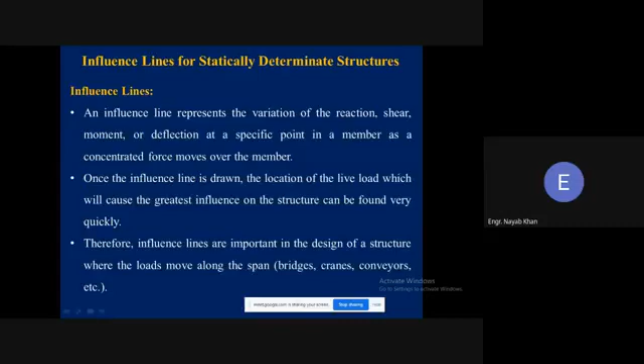But when the structure is subjected to live loads or moving loads, its variation cannot be shown using shear or moment diagrams, it will be shown using influence lines. So what is an influence line? It represents the variation of any reaction.

Let's suppose I'm having a continuous beam with support A, support B, and support C. Now if I subject the member to some moving load, the load will move along the member. If I want to draw the effect of these moving loads over this support reaction A, and I apply the load over here, what will be the condition of support A? If I apply it over here, how much force will be transferred to support A?

So it means I'm taking only one point. I move the loads over the member and determine the variation of the loads at this single point. So the influence line represents the variation of a reaction.

Now let's suppose I am taking a simply supported beam, and I say how much shear will be developed at the mid of the member because of the moving loads. So if I apply a moving load over here, how much shear will be developed at the midpoint? If I apply a moving load over here, how much shear force or moment will be developed at this point?

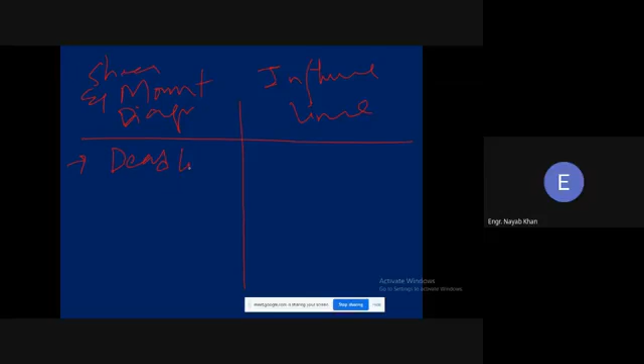Let me show another slide so we can easily write down the difference between the shear diagrams and the influence lines. Here we have a shear and moment diagram, and here we have the influence line. One difference between the influence line and the shear forces: here the loads are fixed dead loads, and here they are live loads or moving loads.

So, next difference. Anyone? Anyone else who can add something to this? Just think over it.

Let me tell you all the difference between the shear force and bending moment diagram and the influence lines. Here we consider the loads as fixed loads, and we calculate the reactions once, the support reactions and the moment, we calculate it once. But in influence lines we will be calculating all the reactions after each displacement of the load. As soon as we displace the load, we have to calculate the reactions again and again, so this is not a one-time case, we will be repeating the calculations.

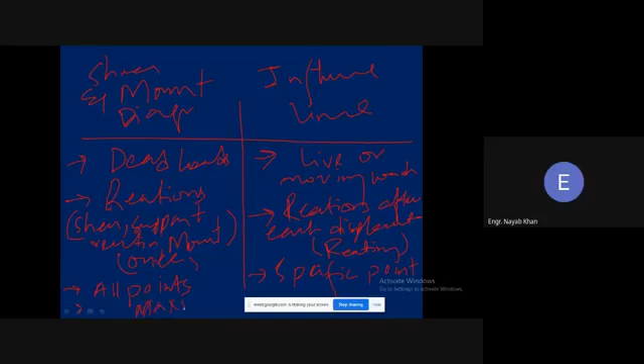Maximum internal forces, and here we get the maximum influence. That is not the internal force developed, that is just the influence when we apply the loads at some specific point and we calculate the reaction.

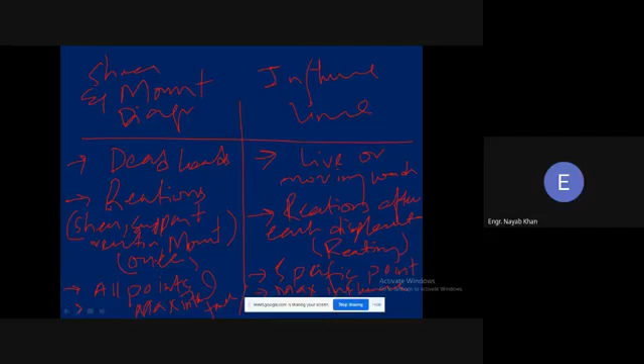So we are determining only the influence over here. The main thing is the same, the shear force and bending moment diagram. We will still be designing on the basis of the shear force and bending moment diagram, but we want to determine the greatest influence of live loads over a structure. That's why we are drawing the influence line diagram for the members. So is that clear to you all now, the difference between the shear and moment diagram and the influence lines?

Clear? Happy? Yes ma'am. Okay, so let's move on.

So here they've discussed only one difference. I have told you three or four differences between these two. They discussed that the influence line represents the effect of moving loads only at a specified point on a member. Just remember the example of a reaction at a support A of a continuous beam and the shear and moment at mid span. So that is what we are considering, a specific point, and we are determining the effect of the moving load over that point. We actually move the loads and determine the reactions, the functions you can say, the displacement, the shear, the moment, and the reaction at a specified point.

Whereas in shear force and bending moment diagram, this represents the effect of a fixed load at all points along the member. So let's suppose if I draw the shear force diagram over here of a member, and if I am having an applied load over here, so a reaction here and a reaction here, this will be the shear force diagram for this type of loading. So what we are doing, we are calculating these reaction forces, these two, and we are drawing the shear force diagram at each specified point along the member.

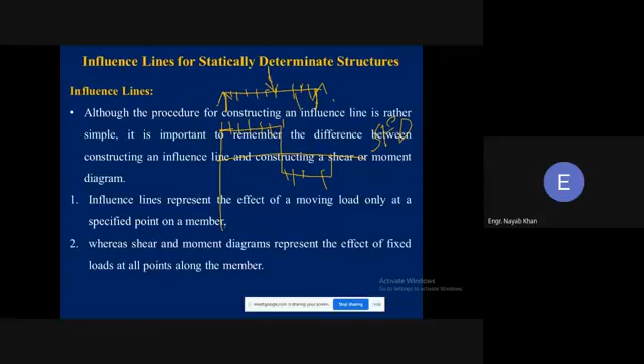Similarly, here we will be having a shear over here. For this point, we'll be having a shear at this point. For here, here, here, here. So we are considering each specified point, all points along the member, and we are drawing its shear diagram.

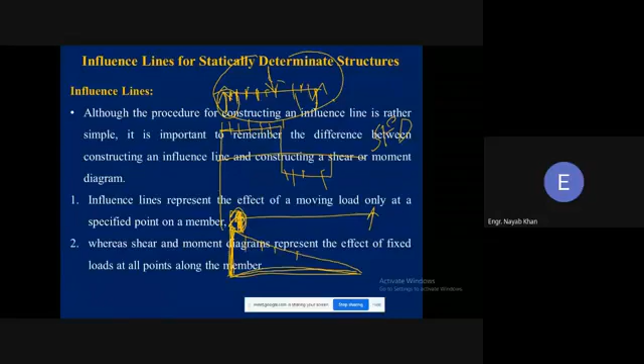But if I told you to draw the influence line for the reaction at A, that will be like this, that there will be a maximum reaction when the load is applied over here. The reaction will reduce when the load moves along the member. So this is the influence line diagram and this is the shear force diagram. You can see in the influence line diagram we are considering only this point and drawing the influence line diagram for only this one point. In the shear force and bending moment diagram, we are considering each and every point along the member. So this is the difference between the influence line and the shear force and bending moment diagrams.

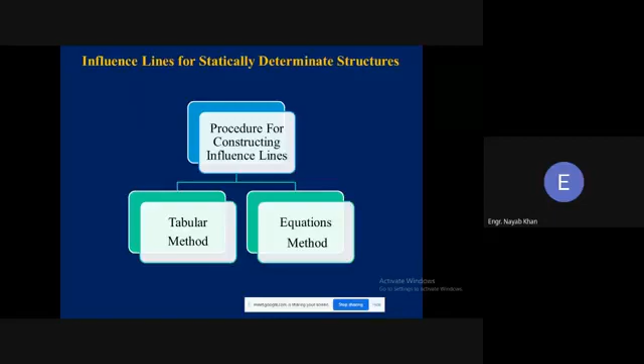So let's move towards how we will go about constructing or drawing the influence line diagram. We can either use a tabular method or an equation method for determining the influence lines. In a tabular procedure, we will place a unit load at each point x along the member.

Let's suppose someone wants me to draw the shear force or the variation of this reaction. Let's say this is reaction at point A and this is reaction at point B. I'll be placing a unit load, a load having magnitude equal to 1, at a point over here and finding this reaction. Then again I'll be placing a unit load over here and finding this reaction again. Again I'll be placing a unit load over here and finding the reaction over here. Then from these values I'll be drawing its influence line diagram, which will look like this.

Similarly, if someone wants me to draw the influence line for the reaction at support B, I'll be placing the unit load the same way. I'll calculate this reaction, then move the load to the next location, calculate that reaction, and move it again, calculating the reaction each time, and then draw its influence line.

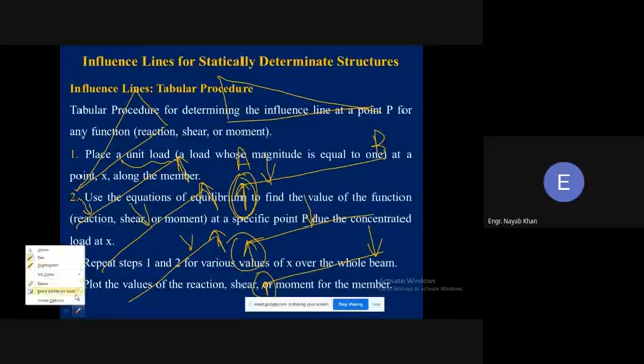So what we actually do is place a unit load at a point x along the member.

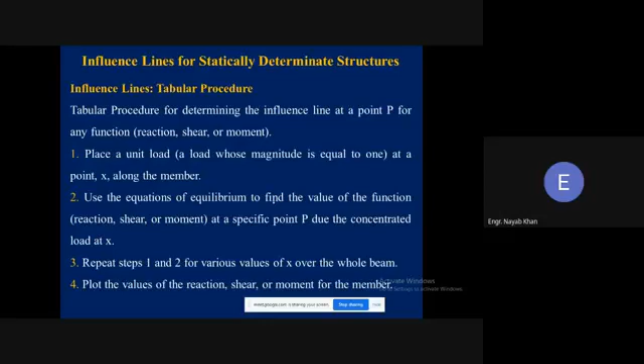So this is the tabular procedure for drawing the influence line. We have another procedure, the equation procedure. In the equation procedure, what do we do?

Let's suppose I have a beam like this and I want to determine the reaction here. I'll place a unit load at a distance x, a load having magnitude 1, and write the equation of this reaction in terms of x. Then I'll give different values to x and calculate this reaction force Ra.

So how will we do this? Let's suppose this is Ra and this is Rb. Take a summation of moments at point B equal to zero. Let the whole length be L, so this distance is L minus X. The moment caused by the unit load will be 1 times (L minus X), and the moment caused by Ra will be minus Ra times L. Setting this equal to zero, Ra is represented as (L minus X) divided by L.

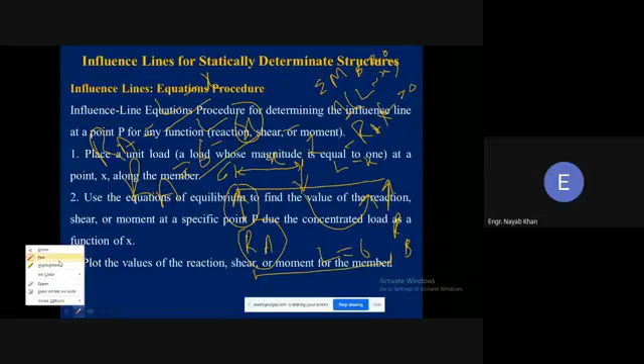So let's suppose this beam is 6 feet long, so Ra equals (6 minus X) divided by 6. Give different values to X and you'll get the reaction Ra at those different distances, then plot the reaction. If you're required to draw the shear, represent the shear in terms of x. If you're required to draw the moment, represent the moment in terms of x. Then at the end, plot the values of the reaction, shear, or moment for the member.

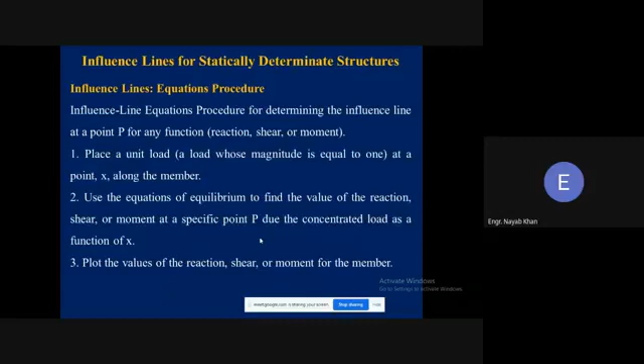That depends on you. Wherever you want to place the load. Even you can place the load at x is equal to 3 feet. Let's suppose if we are putting the load at x is equal to 2.5 feet.

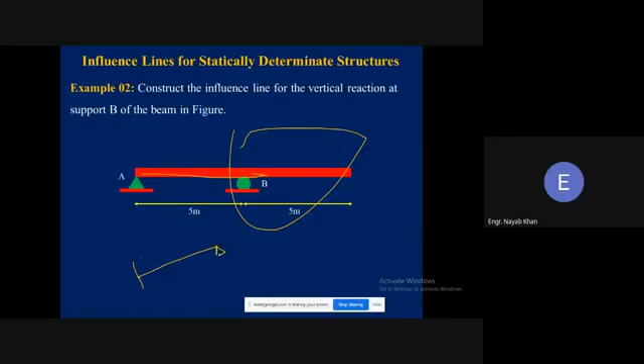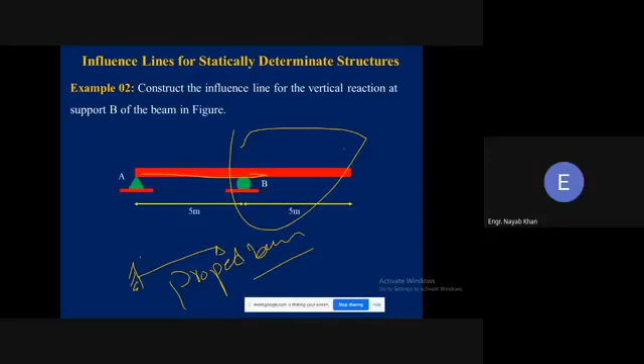It's okay. So in example number 2, we are required to determine the influence line for the vertical reaction at support B. Place the unit load the same way if you are doing it using the tabular method. Place the unit load at x equal to 0 location and determine the reaction force By, taking summation of moment at point A equal to 0. Then again at x equal to 2.5, again take summation of moment at point A and calculate By.

Now move the load to x equal to 5 meter. You will have to move the unit load along the member length. Take x equal to 7, load the unit load at x equal to 7.5. Again take summation of moment at point A and calculate the reaction force By.

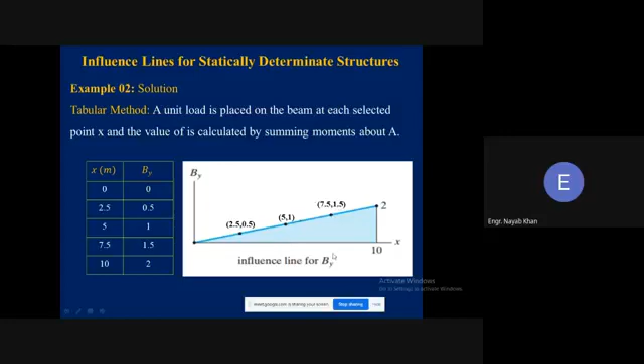But if you have no time, or if time is short, let's suppose in an exam, you can even take 3 or 4 points and determine the influence line for a member - that will not matter much, your influence line will still be correct. You will only have to take the values at the start and at the end. You should not miss these values in between. You can even take 1 iteration or 2 iterations or 3 iterations, that depends upon you.

You can even draw the influence line for the reaction at point B using the equation method. The same way, apply a unit load at a distance x, take summation of moment at point A, determine By in terms of x, then give different values to x - you will get the reaction force By. Draw the values along the distance.

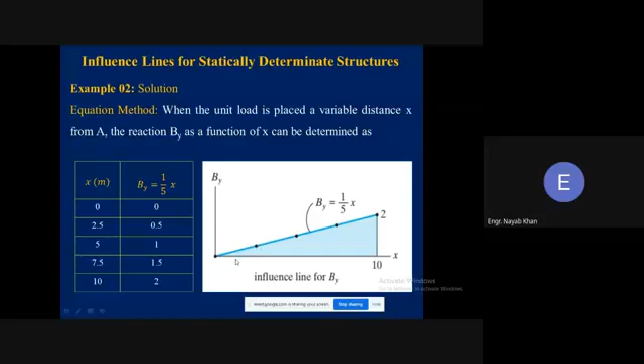So that was about calculating the reactions. Now if we want to determine or construct the influence line for the shear at point C, let's suppose you are required to determine the shear force influence line, so you will be doing it the same way - first following the tabular method and then the equation method, or you can even do any one of it.

If it's not specified to use either the tabular method or equation method, it depends upon you which method you find feasible or easy. You can use any one of those. But if it is mentioned to use both methods, then you will have to use both.

So how will we determine the reaction, the shear force, let's suppose at point C? Place a unit load, calculate its reaction forces. The same way we placed the unit load, then we calculate the reaction both at support AY and BY. So wherever it feels easy, we will take the section from there at C.

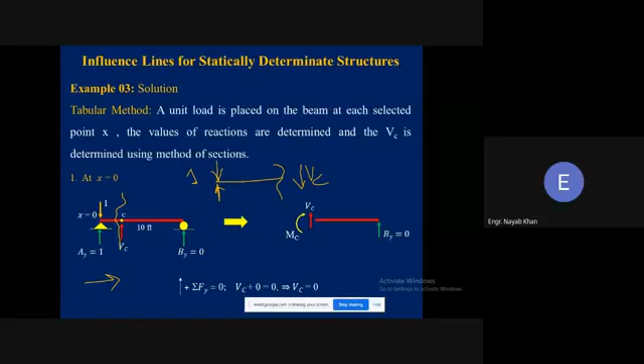Again, place the unit load at x equal to 2.5. Calculate the reaction at AY and BY.

Using summation of moments at point B equal to 0, AY gets calculated. And for calculation of BY, you can either use summation of moment at point A, or use summation of forces in the y direction equal to 0. So reactions calculate karni, I hope this is clear to everyone.

The next thing is that you will be calculating the shear at point C when the load is applied at x is equal to 2.5.

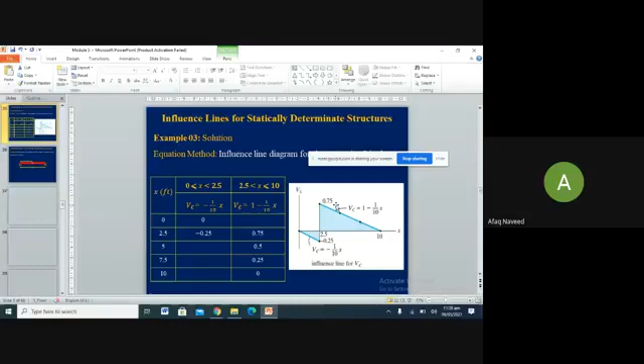Now we have discussed how we will be drawing the influence line for the reactions. Then we discussed how we will be drawing the influence line for shear, let's suppose at any point. Now we will be discussing how we will be determining the moment at a point in a member, and how we will be drawing the influence line for moment.

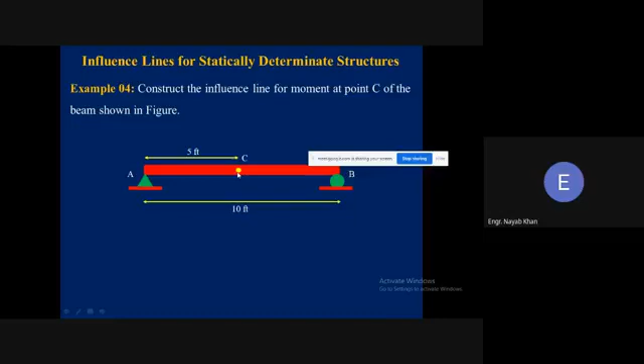In this example, we are given a simply supported beam, and we are required to determine the influence line for the moment at point C. It is not mentioned which method to use, the tabular method or the equation method, so that's up to you. Whichever method you want to use, you can use.

Let's first try it using the tabular method. We will apply a unit load at different locations, calculate the reactions, take a section at point C, and calculate the moment at that section. So at x is equal to 0, let's suppose reaction AY comes out to be 1, BY comes out to be 0. Now take a section at point C.

Humne point C pe section liya. You can calculate it from over here and from over here. Let's suppose we are taking the right section, so discard the previous one, the left portion. We are only determining the moment from the right side. So BY is 0, so the moment will be 0.

Again place a unit load at x is equal to 2.5 feet. Calculate the reactions, and the next step will be taking a section at point C. We consider this portion, and the moment over here will be 0.25 multiplied by 5, plus or minus MC depending upon your assumed sign. Let's suppose counterclockwise moments are taken as positive, so minus MC plus 0.25 into 5. So MC comes out to be 1.25.

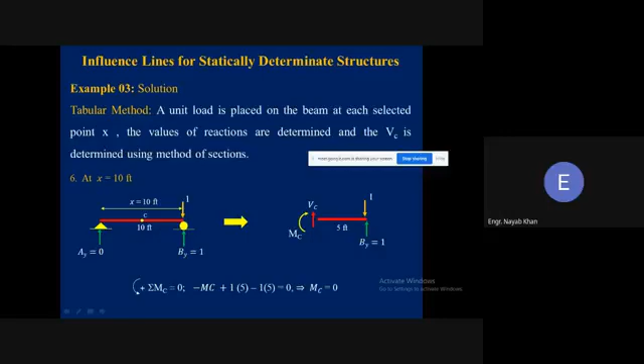Again at x is equal to 7.5 feet, calculate the reaction and take the moment at point C, take a section and calculate the moment. Again place the load at x is equal to 10 feet, and similarly calculate the reaction and then the moment. This will be your moment diagram, the influence line for the moment at point C. You can see at 0 it is 0, at 2.5 it is this much, and then so on.

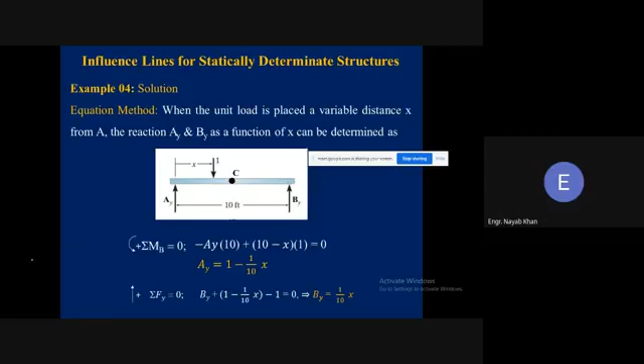If we are using the equation method for determining the moment, the same way, place a unit load at any random distance x and calculate the reactions first. That part is easy, you all will calculate the reactions. Now after calculating the reactions, what you have to do is place the unit load just to the left of point C, that is from here to here.

We are considering from 0 to 5, take a section over here. After taking the section, we will calculate MC, either from here or from here, our choice. Let's suppose we are calculating it from the right, so MC comes out to be 1 over 10 of x into 5. So MC comes out to be x by 2 for this range.

Again, place the unit load just to the right of point C, and again take a section at point C, discard one portion, take the other portion. Let's suppose I'm taking this portion. So the whole distance over here is now x, and this distance till point C is 5. So the distance between point C, where we are taking the section, and the load will be x minus 5, and this distance is already known to us, that is 5 feet.

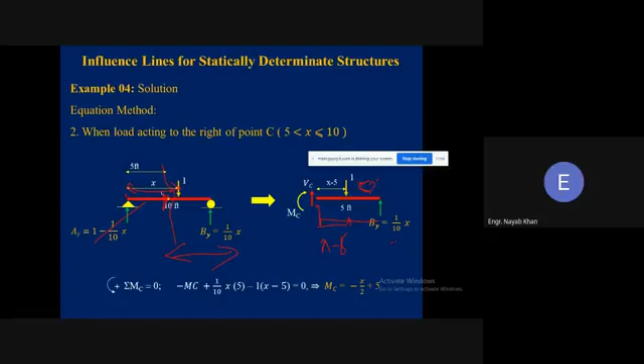So 1 over 10 into x into, sorry, this wall is 5 feet, minus 1 into x minus 5. This will give us the moment in the range of 5 to 10.

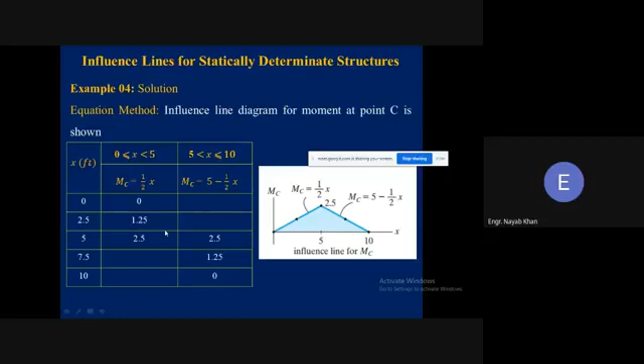So if we are determining the values of the moment, let's suppose at the range of 0 to 5 feet we will be using this equation, and from 5 to 10 we will be using this other equation. At x equal to 5 feet, when you calculate the moment from either equation, both will give you the same result, that is 2.5. So at 5 feet it is 2.5, and the greatest influence of the moment will be at 5 feet, the mid portion.

This is clear? This tabular procedure and this equation procedure are used when we are calculating the values of the shear and the moment. This is known as the quantitative method for the calculation of influence lines. Quantitative method: we calculate the quantities and then draw the influence lines. This is the quantitative method for determination of the influence line for the reactions, for the shear and for the moment.

Now, if you are required to determine the influence line when the structure is subjected to a 10 kip load, what would you do? Here we determined the unit load variation, that if the unit load varies, what will be the shear and moment response at that point. Now if I want you to convert this to a 10 kip load, what would you do? For the unit load we already determined the influence line. Now if you want, you replace the unit with 10. Yes, you can do the same, you can replace the unit load with the 10 kip load.

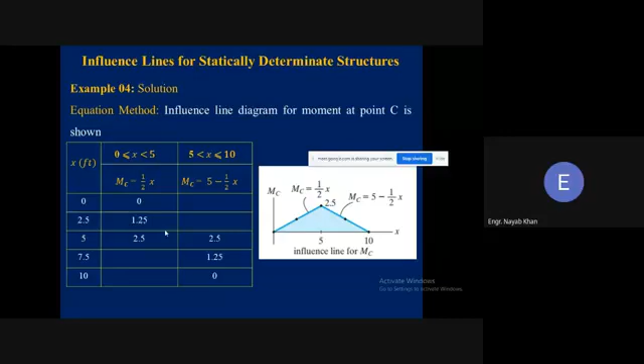And another method which we can easily use is the qualitative influence line. In 1886, Heinrich Müller-Breslau, a structural engineer or scientist, developed a simple method, a rather very simple method, for the determination of the influence line, where you won't need calculations at all.

You will only be considering what? You will only be having an idea of the deflected shape of a member. If you apply a load, what will your member's deflected shape be? On the basis of that deflected shape you can easily draw the influence line simply. So the Mueller-Breslau principle states that the influence line for any function, that is for the shear, for moment or the reaction, is to the same scale as the deflected shape of the beam.

Whatever your deflected shape is, that will be your influence line, according to Mueller-Breslau, when the beam is acted upon by a function. Let's suppose you are required to determine the reaction at point A, the influence line for the reaction. So on that influence line, at that reaction, if you apply a load - let's say I have this simply supported beam, and I need to draw the influence line for the reaction at point A, so this is my beam. I'm only considering this load.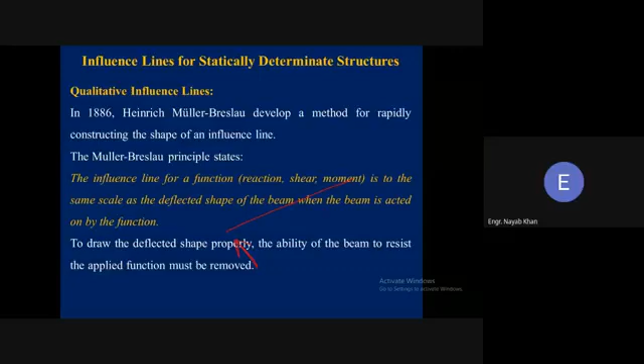I'm only considering this load. So consider this: if we apply a load over here, what will happen to this beam? It will move up. If we apply a load here, you have to imagine this, what will happen? Here there is another reaction, so the beam will not move from here. But if we apply a load at this location, the beam will move up like this, and here it will not move.

In the previous examples we studied this thing - you saw that our influence line was AC. So because of this load the beam will move like this, the beam will move up. This is the deflected shape of the beam with respect to this load. So you can see this deflected shape is your influence line, the same one we already calculated, in the same way.

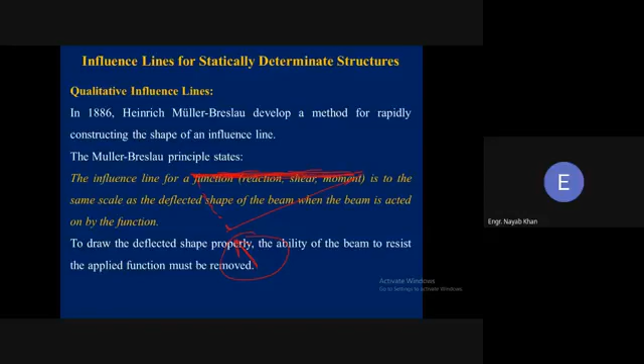So to draw the deflected shape properly, the ability of the beam to resist the applied function must be removed. Let's have an example, then it will be clear to you. The shape of the influence line for the vertical reaction.

So what will we do? Let's suppose we apply a reaction force here, so at B it will be resisted, but at A it will not be, so our beam will move up. This will be the deflected shape and the same will be your influence line diagram for the reaction at point A.

Similarly, you can do it for the reaction at point B. Suppose we do it at point B, so we remove the reaction at A, and apply the reaction at B. So now the structure will not move at this location because there is no load over here, but there is a load over here, so the structure will move up here, and similarly towards A it will go to 0. So this will be the influence line for the reaction at point B.

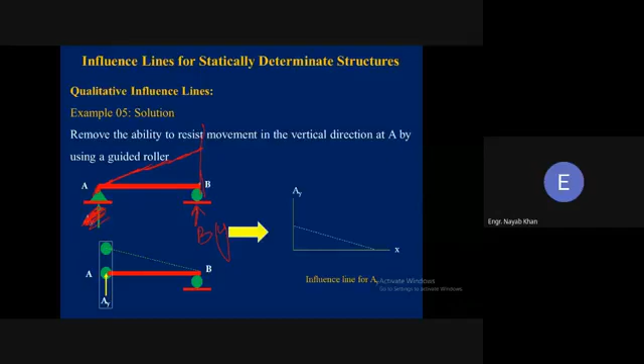Simply using the deflected shape. Now let's suppose find the shape of the influence line for the shear at point C. So what will we do? We will change this point C into a roller support to draw its deflected shape.

We will change this into a roller support. So at C we have a roller support, on the left of which, if we are considering the reaction force, the left side shear is taken as downward positive. And here the upward shear is taken as positive.

So this shear will try to move the member down, and at this location we will not have any deflection, so from A the deflected shape will be with us. Similarly, this shear will try to move the member up, and here at B there will be a reaction, so this support will not allow the structure to deflect.

So from here, the deflected shape we get will have zero deflection at B, so zero. So you can see over here, this is the deflected shape in case of a shear. We have determined it already. So just by drawing the deflected shape, we can draw the influence line for shear according to the Mueller-Breslau principle.

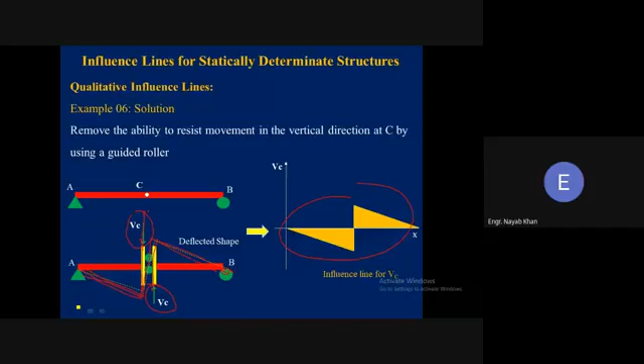Similarly, if we are required to draw the influence line for the moment, at points A and B there are supports, so there will be zero moment there. Now suppose I apply a moment like this over here, so this moment will try to move the member up like this, you can see. So the structure will move like this. Similarly, this moment will try to move the member upward like this.

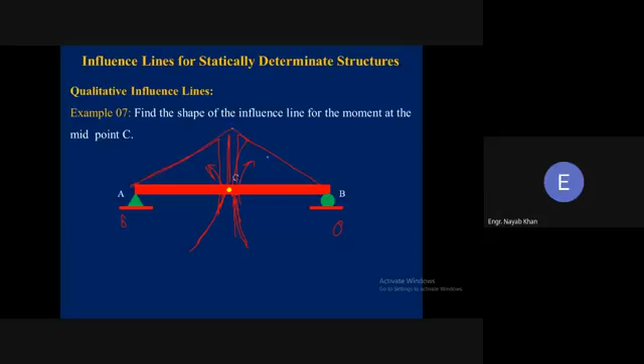As if we are applying a load from below at this point, this structure will move up like this. So you can see what will happen at point C? This one. So this will be the moment diagram based upon the deflected shape.

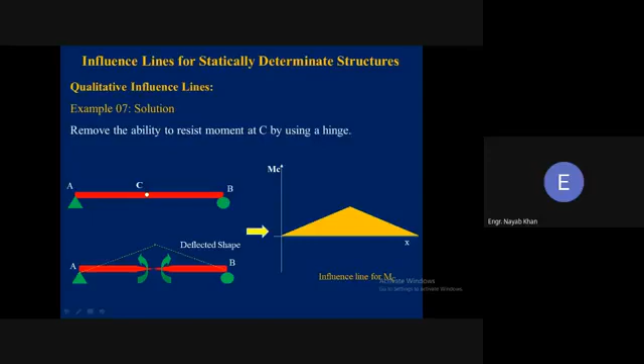So how easy it is that we just imagine our loads, we imagine our loads like this, how it will be deflecting our beam. So based upon that, we can apply the Mueller-Breslau principle to draw the influence line qualitatively. Similarly, you can see over here.

If we want to draw the vertical reaction at point A, suppose we apply force here, this support will move up, this other support will not move because it will resist the load. So when this support moves up, since this portion is overhanging, it will also move with the structure like this. From here our structure will move, here there will be no movement. So when there is no movement here, this overhanging portion will come down. So this is the deflected shape simply, and drawing this deflected shape will give us the influence line.

At this support zero movement, zero deflection, this portion will move up and this portion will move down. Similar is the case.

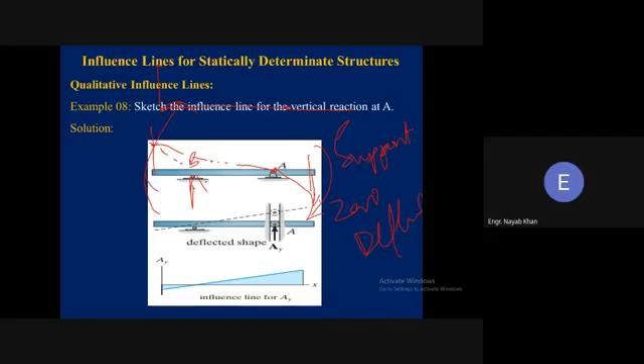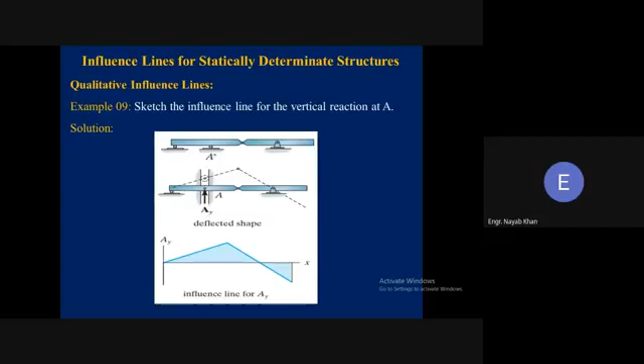Similarly, if we want to sketch the reaction force, and if we have an internal hinge at the location, the hinge portion will move. Hinge is not a support, I already explained this. So the hinge portion will move up, and when it moves up, the other portion will start moving down. This will be the deflected shape when we apply the load at reaction at support A, and this will be the influence line for reaction AY, same as the deflected shape of the member.

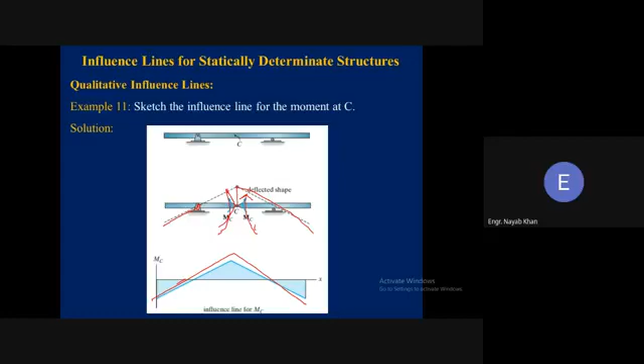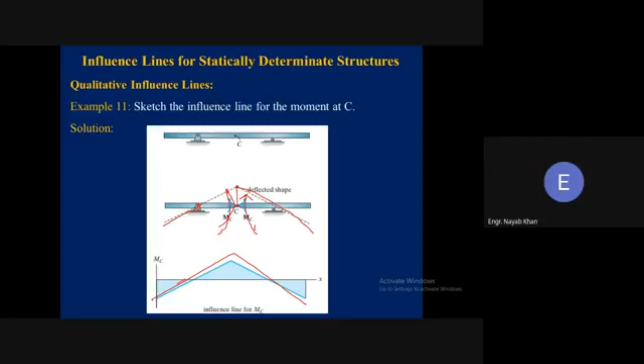So this is all about drawing the influence line for beams. For beams, we can either use a quantitative method or a qualitative method. Both methods can be used, and the qualitative method is easier in the sense that we are only focusing on the deflected shape of a member. As soon as we have the deflected shape, the same will be the influence line for the shear, for the moment, and for the reaction. So assuming or imagining the deflected shape of the member is the most important thing to keep in mind while drawing the qualitative influence line for a function at any required point. Now is there any difficulty or confusion in drawing the influence lines for the beam conditions? No? So now let's move towards drawing the influence line for the trusses.

How we will be determining the influence line for trusses - most bridge structures are above the ground level, so providing heavier members may affect functionality. Usually in longer span portions we mostly provide truss elements or truss bridges. It is lighter in weight and more economic because compared to a beam we use less material while designing truss members, and in places where shear forces are not dominant we can simply use truss elements.

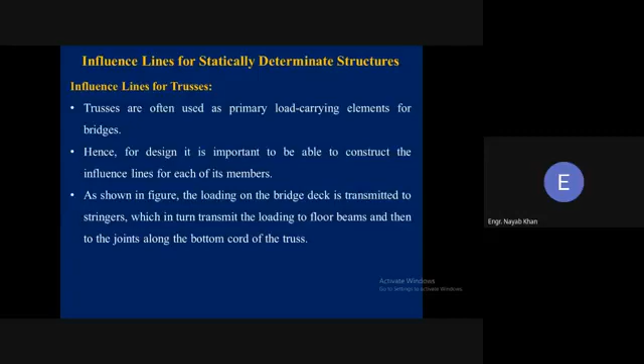As shown in the figure, the loading on the bridge deck is transmitted to the stringer. We have discussed this in detail before. So who will explain the load carrying mechanism of this member which I have opened? Anyone? Let me pick a person - let me pick myself.

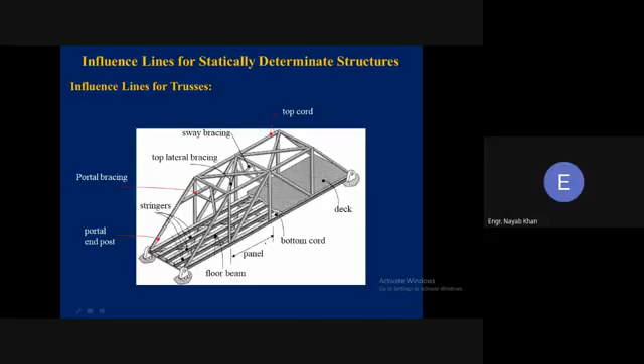So since the truss members are affected only by the joint loading, as we have discussed this in detail, we can therefore obtain the ordinate values of the influence line for a member by loading each joint along the deck with the unit load.

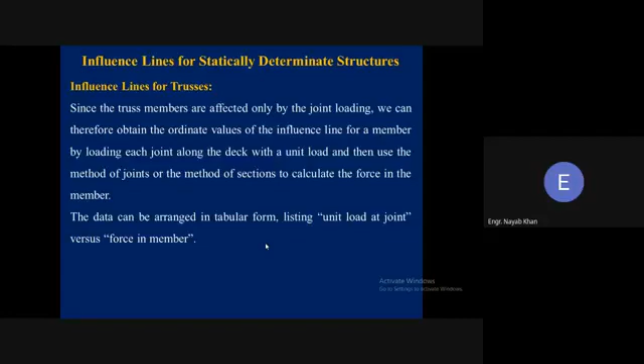We will move the loads to different panels and calculate the force in this member the same way that we have done for the analysis of the trusses, using method of joints or the method of sections, and this will give us the influence line for the truss member.

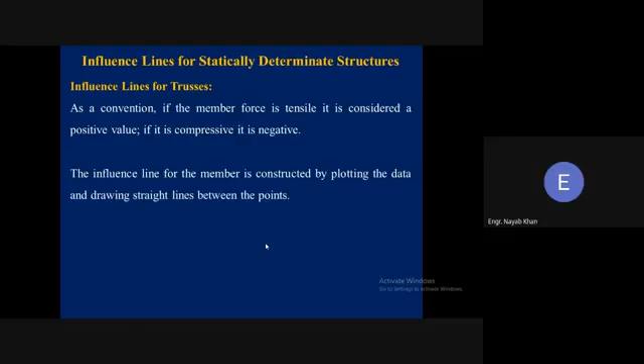So as a convention, I already told you that the tensile forces are taken as positive and the compressive forces are taken as negative. The tensile forces are taken away from the joints and the compressive forces are taken toward the joint. So the influence line for a member is constructed by plotting the data and drawing the straight line between the points. For example, if we are required to determine or draw the influence line for the member GB of this truss.

So this AE, what is it actually? This is actually the same deck, you can say. If we extend this thing, so this is what? This is a deck. Similarly, the small portions of it are connected to each other using this, in the same way.

So you can consider this thing as a whole, and another member like this one. So what is this? This is the whole bridge structure. And we have taken just, you can say, a two-dimensional or a plane truss element from it for our analysis purposes.

So we will be having different panels, and another panel over here, and similarly in another panel. So different panels will be there. And in the different panels, this member will be classified as the GB member.

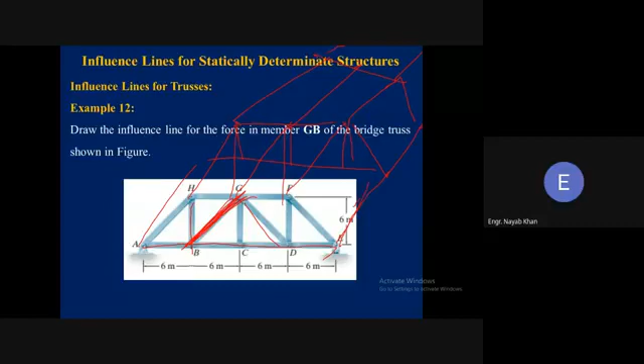First of all, what will we do? We will apply unit load on each successive panel. Let's suppose I am applying unit load over here. So because of this unit load at point B, I'll be calculating the reaction at point A and the reaction at point E, the same way we did previously. So the reactions are calculated now.

Now I'll be taking a section over here. You can even use this portion to calculate the GB member. The force will be then like this, the force GB. They are taking the right section, so let's take the right section. So from the right, I am having this. The cut members are GH member, so its force is unknown. The cut member is GB member and its force is unknown. And the cut member is BC member and its force is unknown.

So what can we do? We can take summation of forces, as HG and BC are both horizontal members. So the easy way is to take summation of forces in the y direction.

This GB member is inclined at an angle of 45 degrees, so one component, FGB sine of 45, will be acting downward, and its other component, FGB cos of 45, will be acting leftward. Taking summation of forces in the y direction equal to 0, GB comes out to be 0.354.

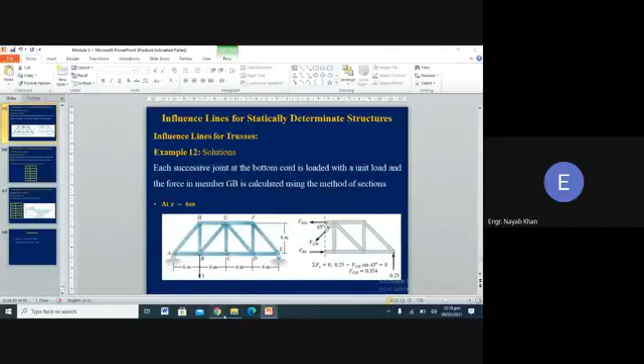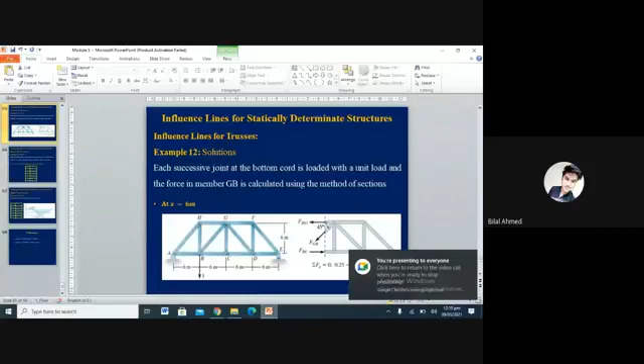Bilal Ahmed. Bilal Ahmed. Yes, ma'am. How much will be the reaction at point A? Ma'am, just one minute, ma'am. Okay, so...

Calculate it - the unit load is not over here, it is at point B. Calculate A and E, RA and RE.

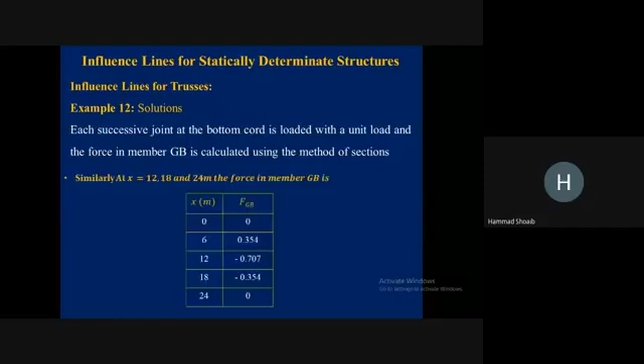0.353553. 0.353553. Exactly. So this will be rounded up to 0.354.

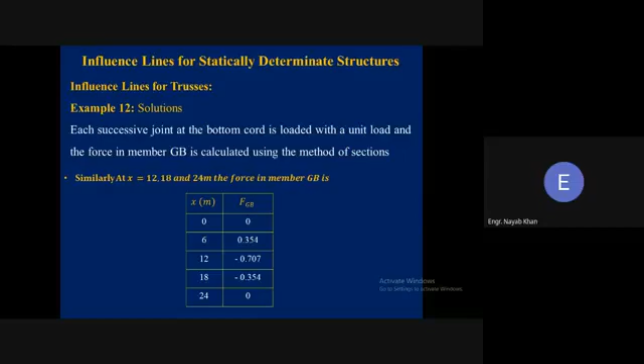Very good. So we will be moving the loads along each joint, and we will be calculating the member forces, and then we will be drawing its influence line diagram.

So at x is equal to 0, it is 0. At x is equal to 6, it is 0.354. And at x is equal to 12, it is minus 0.707. Similarly, at a distance 18, it is this much, and at a distance 24, it comes out to be 0.

So greatest influence at which point will we have in this structure? At which point will we have the greatest influence in this structure? X is equal to 12. It will come at 12, at 12.

Mam, at 12 we have compressive effects. Exactly. So the compressive effect is 0.707. But the thing you have to mention is that the compressive effect will be more at x equal to 12, and the tensile effects will be more at x equal to 6, as the member may be subjected to either a tensile force or a compressive force.

So if a force is such that it is causing tensile forces in a member, it will be having a greater influence when we apply a unit load at x is equal to 6 meters. And if we are considering the compressive effects, the member will have more influence regarding the compressive forces when we apply a unit load at location x is equal to 12 meters.

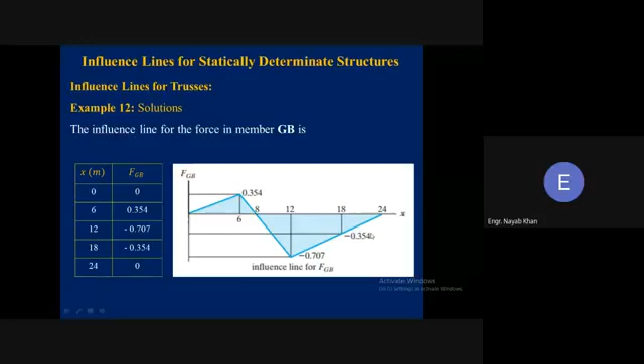So this is the influence line for the forces in member GB. You can do it for any of the members, like you can do it for even the member GF.

Member GF. So let's have a practice over this. Draw the influence line for the member GF.

Do it right now in class. All of you are required to do it. Just calculate the influence line for the member GF of this.

Stay awake everyone. I may ask any one of you to send me the influence line of member GF on WhatsApp. I can call any one of you. So do it right now.

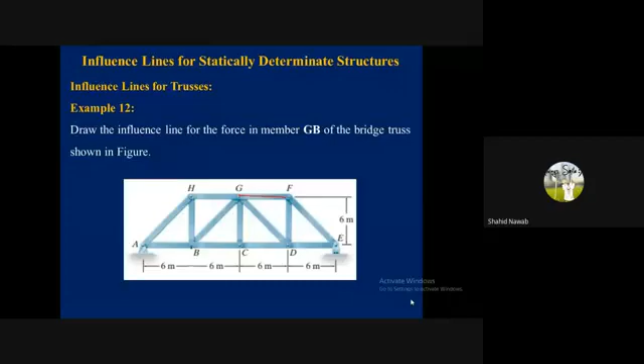Very good. So this is the point over here. This member is a horizontal member, yes mam, and the loads are all vertical.

So there will be no variation of forces in this member. And as the joints at which this member is connected, there is no load there. So this is a zero force member, you can say. So there will be no influence line for this member.

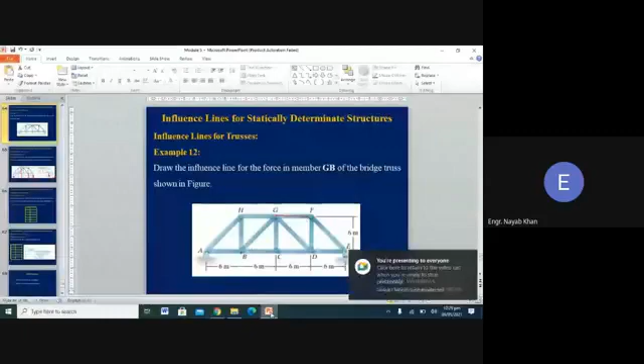So very good, who has an idea, whoever's mind came up with this idea to tell me that mam it's a horizontal member, very good to all of them. And whoever said it first, very good to him as well. That is what you have to think using an engineer's mind. So those are all very good students in structural engineering or structural analysis who got this idea in their minds. All those students who have this idea are the brilliant students in structure. So very good to all of you.

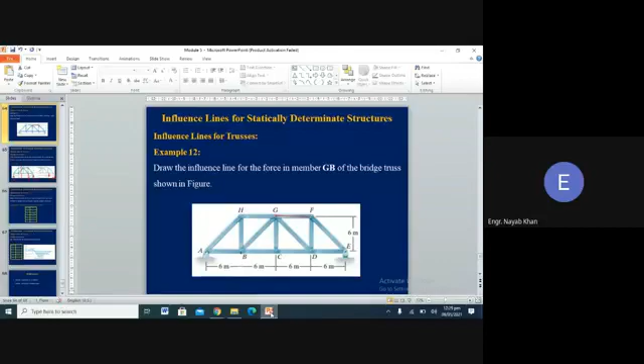So this is the point I want to check, who will get the idea. So that's all about today's lecture. I hope this was an interesting lecture regarding drawing the influence line. So anyone having any question?